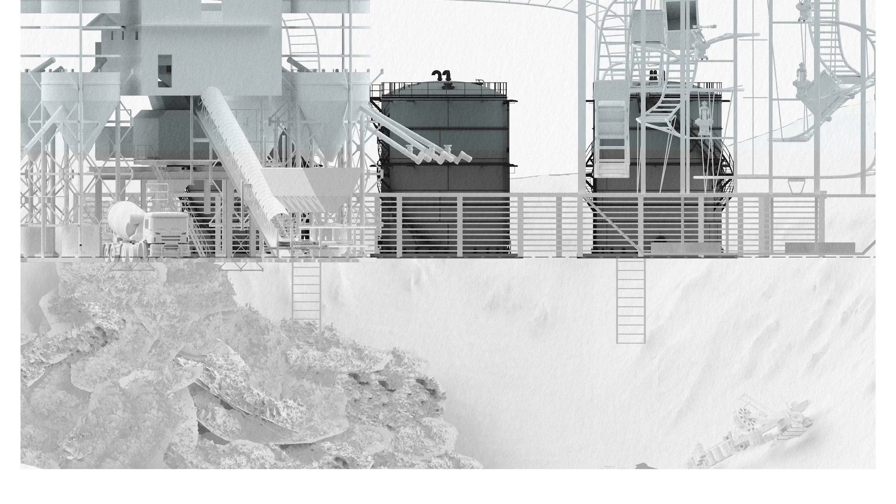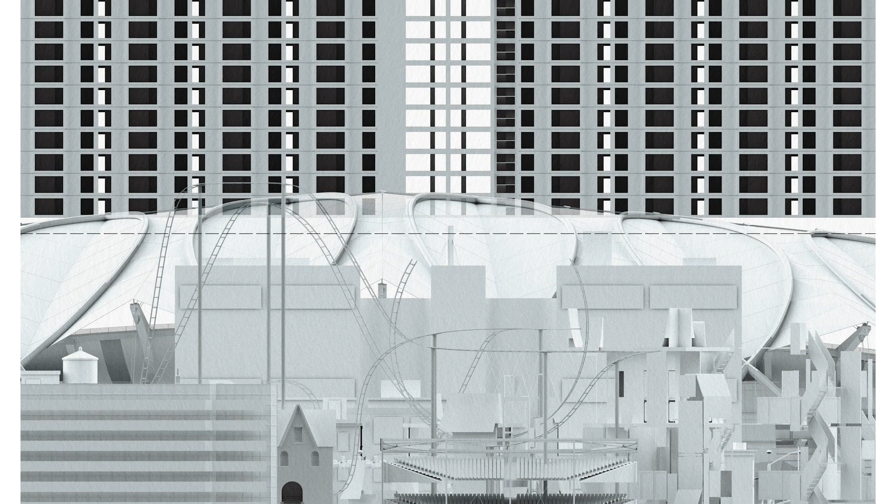My name is Matthew Cooper, and my project is called Reclaiming the Ghost Cityscape. I am looking into architectural scenarios to reclaim ghost cities. The recycling and upgrade of concrete structures from these cities will alter the city skeleton to suggest a new material-based approach. Form, which uses materials that help achieve carbon neutrality, has not yet been sufficiently explored in my opinion. The project will communicate concrete's potential in reclaiming cities, thus preventing the mass demolition of decaying, undervalued typologies.

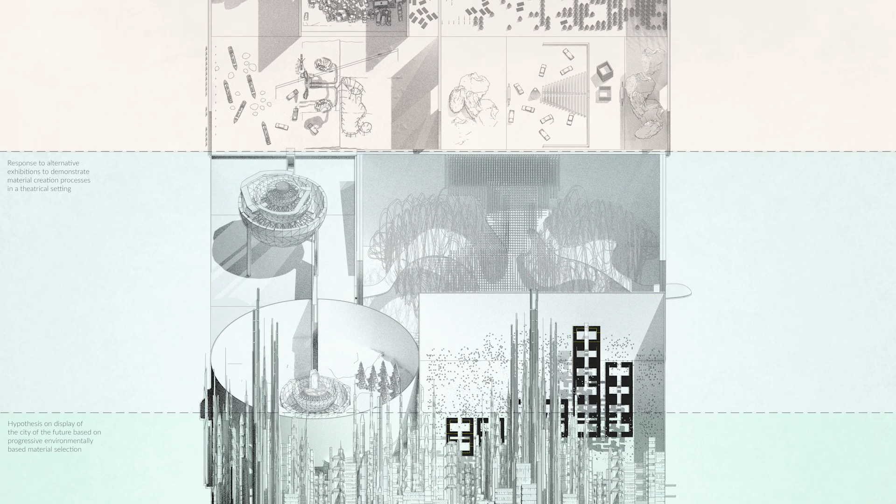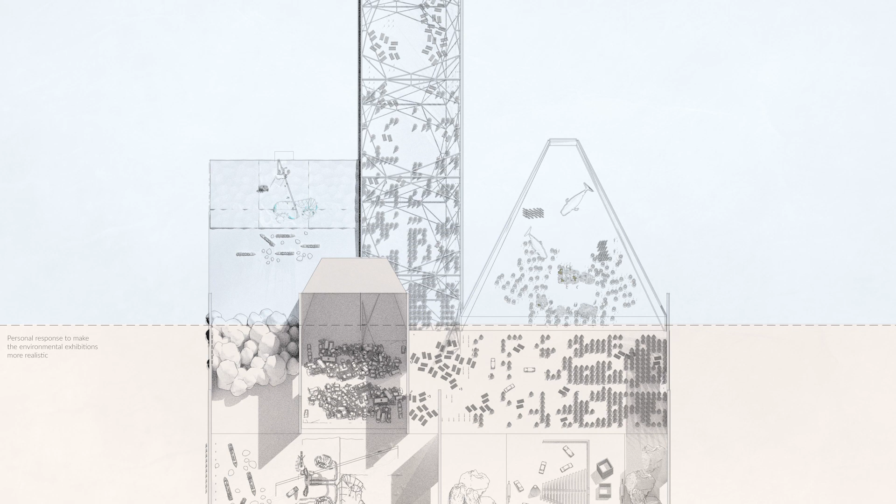The project endeavoured to understand the complexities of moving material from extraction through to construction, driving an investigation into the global displacement of timber, steel and concrete. Further scrutiny will demonstrate the repercussions of abandoning a city.

Globally, sand mining, tree felling and ore mining are major components to produce urban structural materials. Material travel is standardised in the construction industry, and to reduce the impacts of needless intercontinental material displacement, the localisation of raw material extraction and construction needs to be promoted.

The project theorised the appearance of a city that uses raw material from the local vicinity. In the case of timber, it is commonly used due to carbon-related issues. However, in steel and concrete, large construction typologies and speed to rapidly grow a city are the focus. The selected material of interest for this project is concrete due to its continuous use.

In the scenario of altering the skeleton of a nondescript city through a material-based approach, it was vital to develop an understanding of concrete trade globally. The project argues for intercontinentally imported material to be eradicated in favour of the potentially more expensive localized alternative.

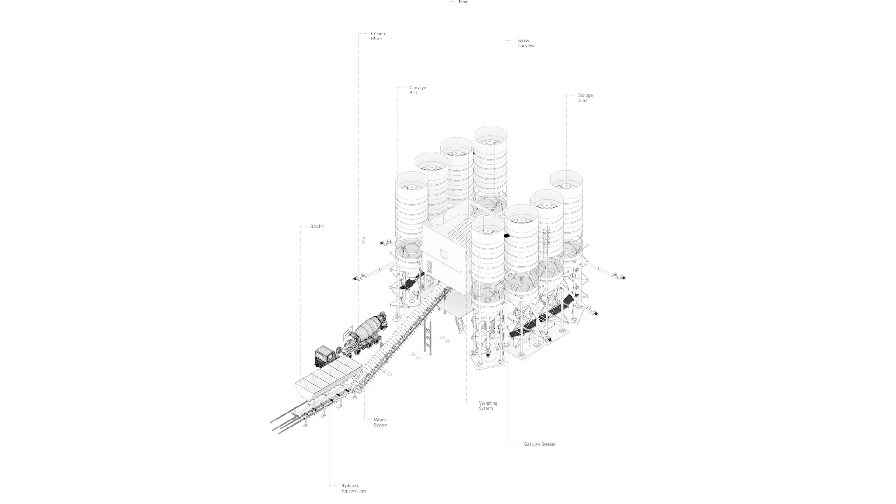The removal of this standardized idea of importing concrete intercontinentally will lead to a sustainable benefit, as the project not only wants to demonstrate the ability to transform an abandoned city through the use of material, but wants to reinforce the potential for a more sustainable approach when using the material.

The main purpose of my research is to question concrete in the context of a speculative project on an urban transition from an economically beneficial megaproject to a composite ghost city. The term ghost city is applicable to many situations, such as reduced need for mining or overinvestment in housing.

The project will analyse an abandoned ghost city through cinematic scenarios and propose an alternative future where utilising modern technologies will allow for an architectural insertion to shift typologies within moments in the city. It is vital the project reflects the potential for ghost city sites to be adapted for future use.

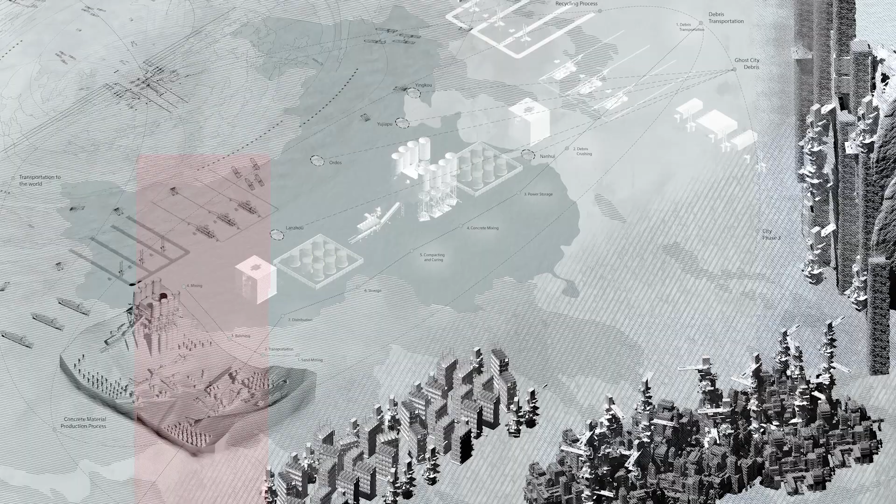The project has focused on symptomatic precedents of these cities in Eastern Asia. Ordos is a derelict city that was created to shift the economy of China from agricultural to urbanised through a boost in the housing market.

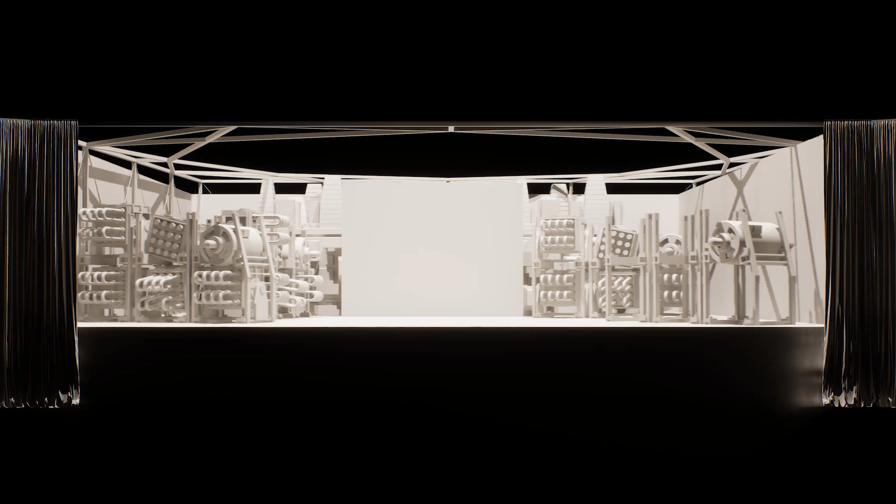The government relocated a top school in China, so people had to move. The displacement of people was a political decision striving for economic growth. However, there is still an emptiness which needs to be filled, with much of the city still abandoned.

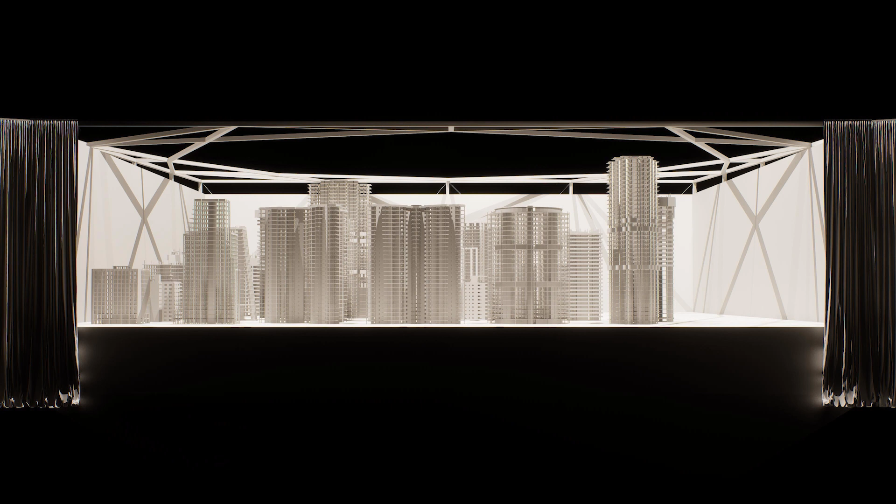The project will generate a speculative urban scenario and form a solution to a problem which appears through investment for economic growth. Furthermore, it was in need of future adaptation with an alternative typology to the residential, or these alternative moments.

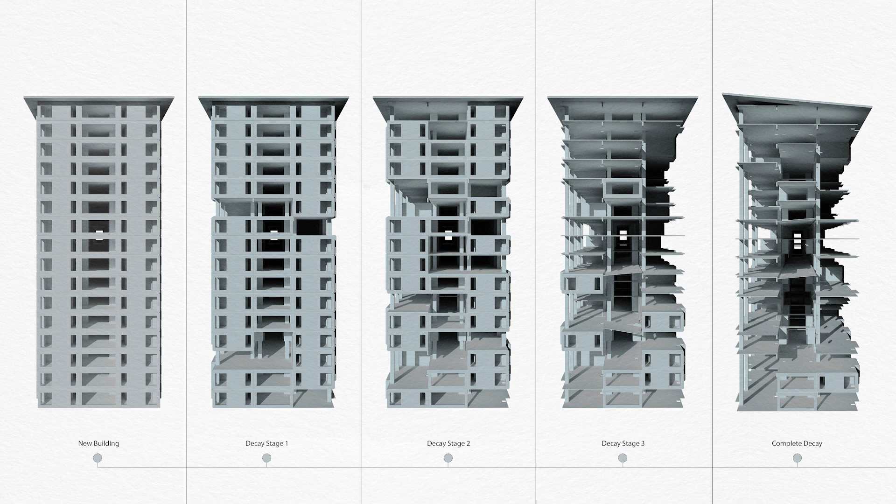In 50 years, population growth is predicted to increase by 2.4 billion. It is paramount for future rapid growth cities to have a typological balance in urban dynamics between mass residential districts and alternative sets of programs from reusing decaying sites.

The project questions the potential for reusing concrete structures in the city in the future. Is concrete a failing material? Or can the reuse of concrete building sites be the focal point of reurbanisation? When implemented in the city, what spaces should it be applied to? These questions will allow the project to argue for itself as a contributing source to alter material use and design alternative spaces in the city.

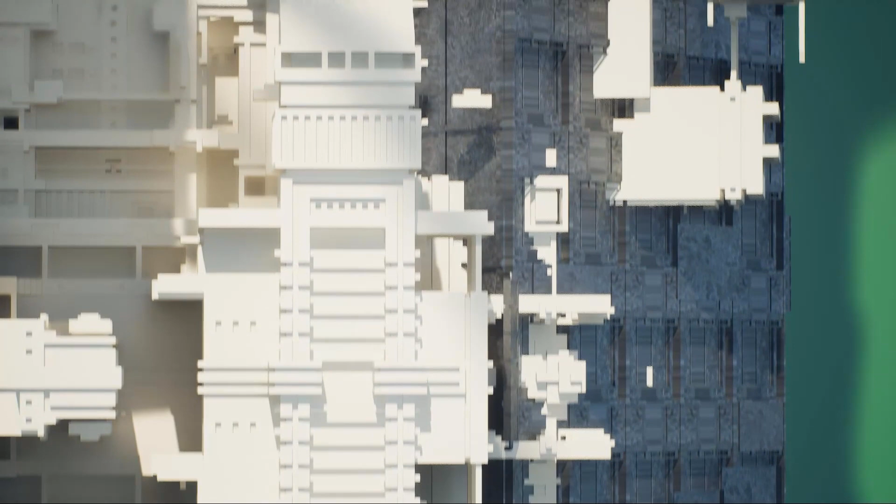I have formed a three-level speculation: on a material level, a typological level, and a city level. The development of a cross-typological space is an ambition to drive the inhabitation of the project's nondescript city. My film allowed me to balance the chaos of the city in a hierarchical order to investigate emerging typologies. This exploration allowed the project to identify space that is inhabitable in the juxtaposition of the planet city and its reverse with abandonment as its highlighted use.

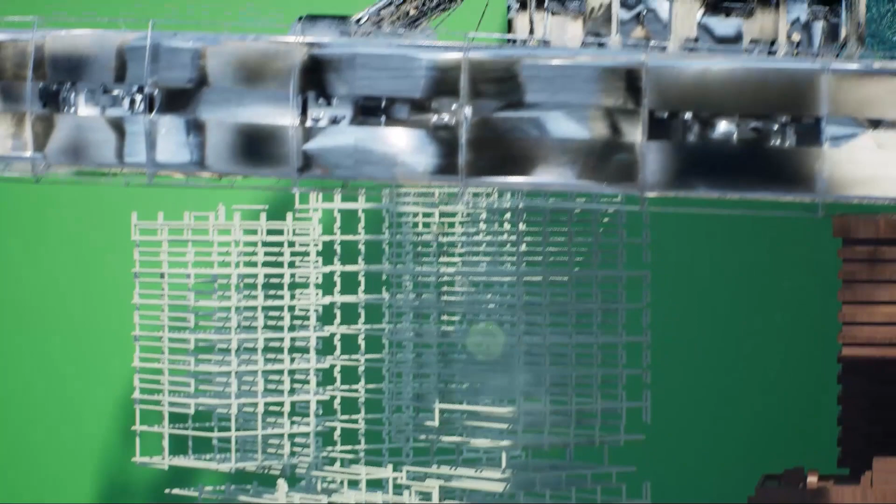These cities accommodate dense living conditions, however are problematic with their application to and reusing empty spaces. The project focused on the planet city as a framework to develop an identification for extra low density and what emptiness and abandonment can potentially offer for architecture in a nondescript ghost city future scenario.

The project focuses on the adaptation of moments within a nondescript city. The nature of the placement of the space in a site that needs recycling and repair will advocate for the extension of our knowledge regarding the malleability and potential for concrete interventions that intersect, bore, and carve new space into existing buildings. The form and structure of the city will alter through a series of interventions.

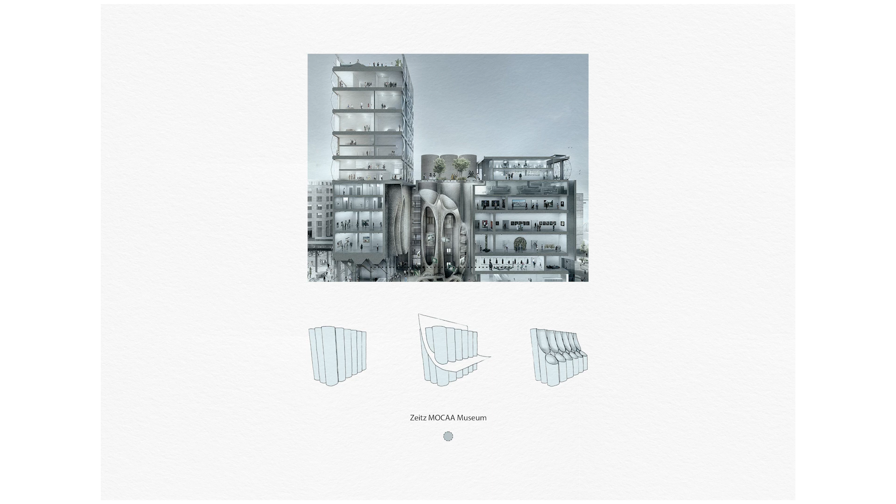The project proposes that it would need new core, atria, internal divisions for the new typologies planned for the intervened moments. The project will take a similar approach to the Heatherwick project in South Africa, using structural concrete reinforcement to make circulation space for visitors and alternate the typology within the reused space.

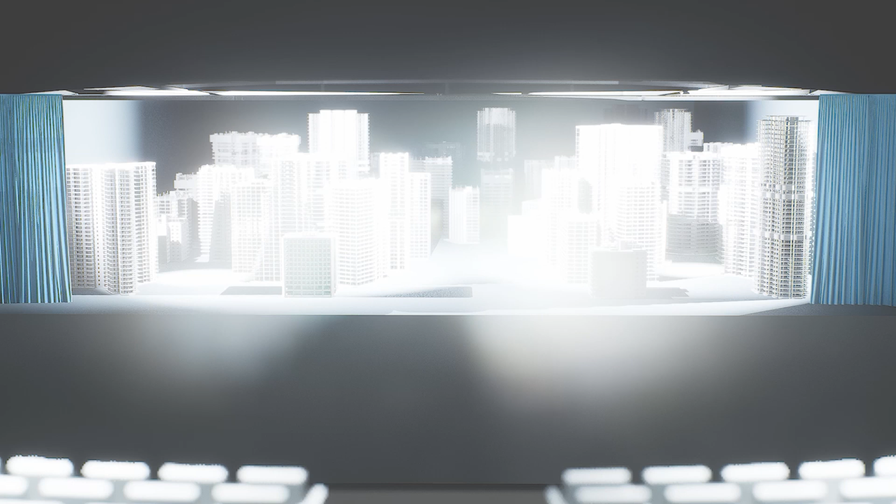Furthermore, using advanced drone technology, the drones would create a 3D scan where it could geolocate weak structural points and intervene with them. The project is aiming to alter typological moments in a nondescript city, using concrete to infiltrate its structural system and morph into an entertainment space.

As time passes, the city will decay and debris will fall over time. This is a problem cities will face in years to come. However, moving away from contexts that demonstrate this pragmatic issue that many locations are facing globally, the city needs a solution to its abandonment. It needs to be decayed enough to require a reinvention and reinforcement of moments that span across a multitude of abandoned typologies.

Preceding the discovery of these moments, an intervention and typological shift would be valid to reinvent and repurpose areas of the city to attract people to the reiteration of the city.

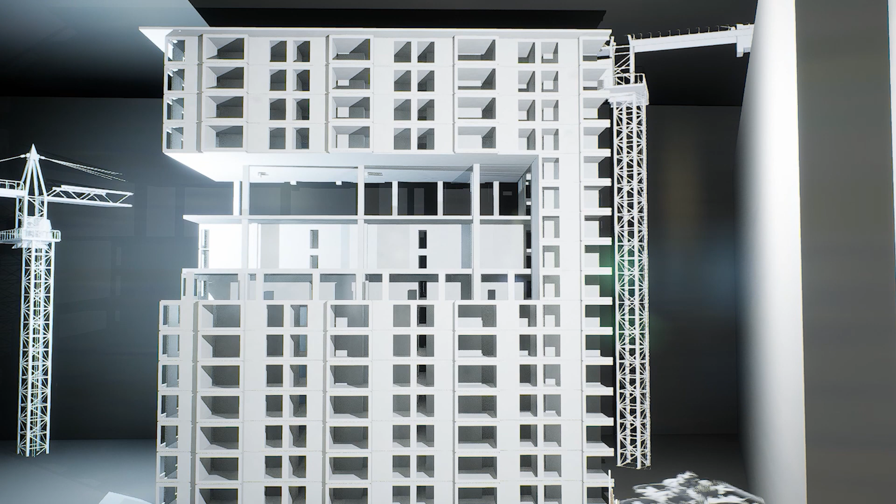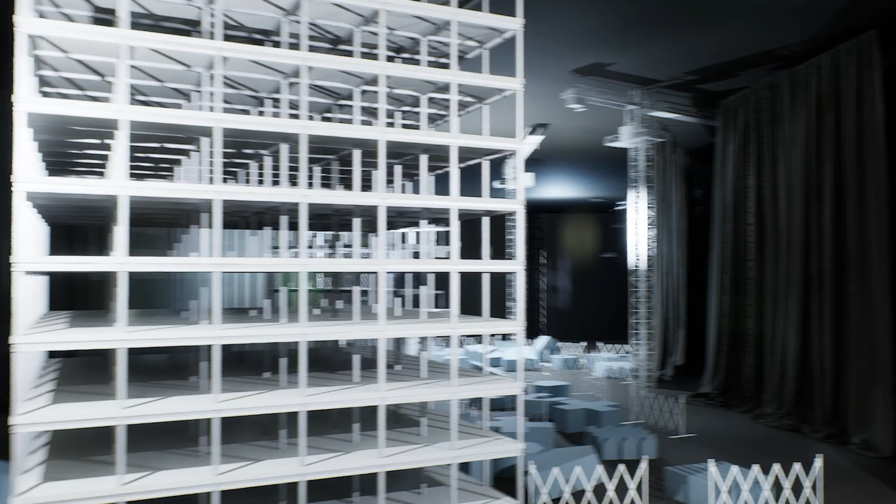The city's projected spaces will rely on the recycling process to be able to synthesize debris from the city with the new concrete material. The intervention should be strategized to intervene with the architecture in such a way that an intrusive architectural language is formed.

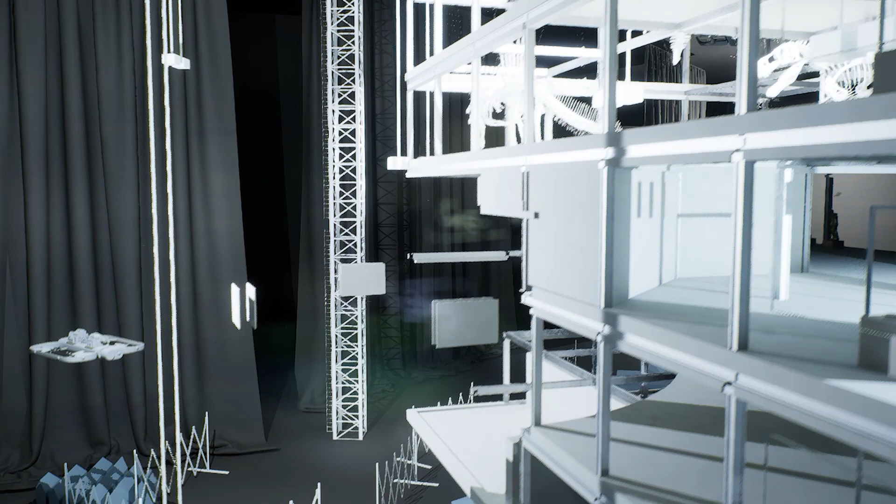The creation of these moments depends on the technology of the future. With the condition they are currently in, the moments would be impossible to reinforce and intervene with under current regulation. Furthermore, it would be possible with future technology, developments in AI, geolocating and drone technology.

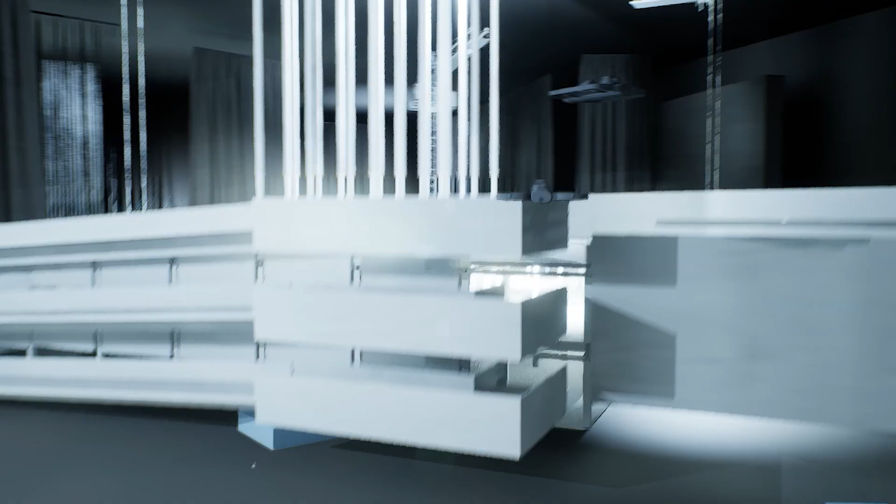The abandoned city consists of a multitude of abandoned buildings and is a vast wasteland of potential space. Therefore, the project's architectural spaces aim to collide with, intersect with, bore and carve into areas presented by the office, residential, car park and transport spaces, allowing the specific programs to be demonstrated but not limited to, for example, reservation for museum spaces or art gallery spaces or any sort of space associated with entertainment, so that it may depict a reiterated semi-abandoned future city.

Ultimately, the project must convey moments that have been developed so that their skeleton is altered to reform a ghost city to be reclaimed as a metropolis. The project must convey the crossover of typologies to develop the quality of a public space as a new intervention.

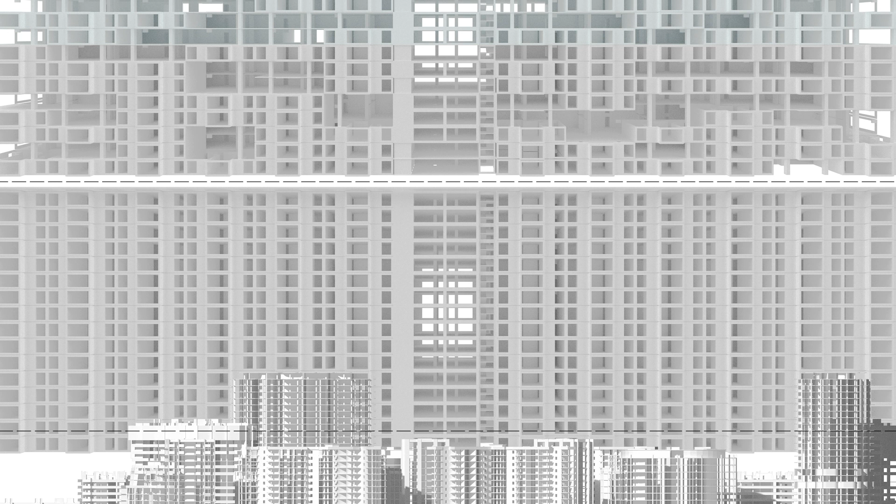The typological shift will construct political and economic scenarios by offering the adaptive reuse of cities with environmental benefits to the city being reactivated. However, due to the speculative nature of the project, the proposed solution has its practical limitations. Additionally, focusing on a local system of material production has not been realised.

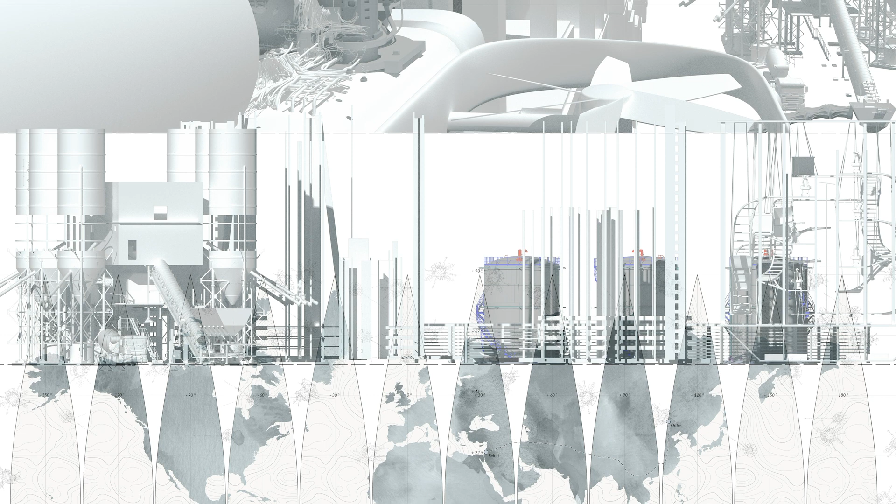The project aims to be a set of typological experiments deriving from the adaptation of a rapid growth city, which will fluctuate to test the quality of public space in the crossover of typologies. The potential for the project to convey these tests successfully lies in demonstrating the new cores, atria, internal divisions, and links to infrastructural systems with both formal and technical investigation.